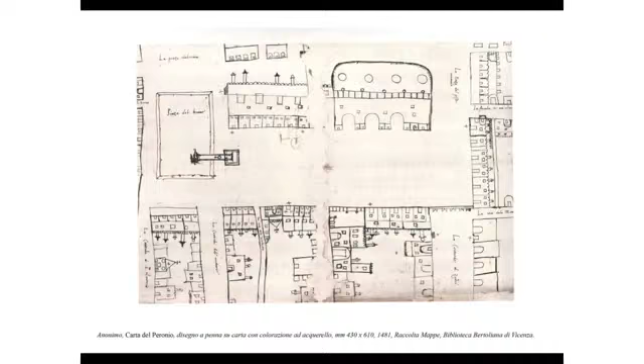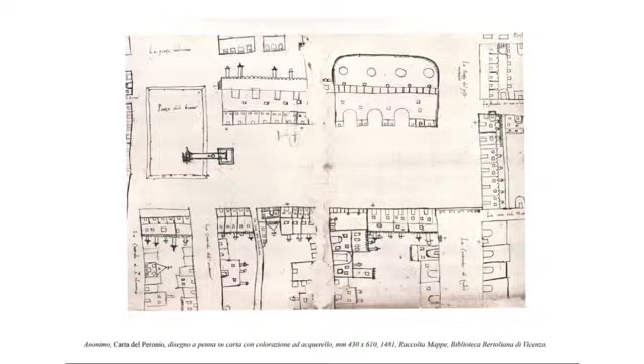After Palladio's intervention in 1550, the basilica has not been substantially modified up to now. In the 19th century, various proposals to modify, sometimes significantly, the large hall and the arrangement of the workshop were submitted. However, none of them was implemented.

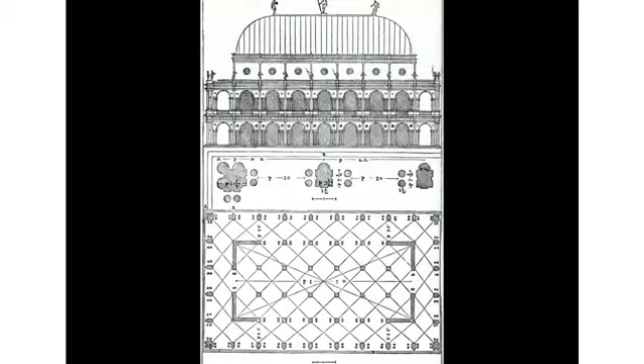Meanwhile, Palladio's worldwide reputation was growing, drawing the attention of the public. However, this interest also entailed a certain degree of carefulness.

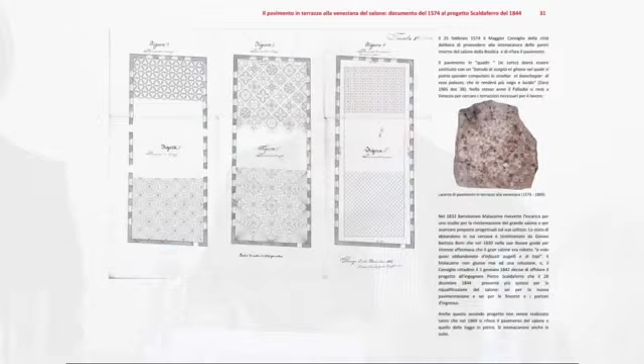We see the 19th-century project of transformation. The maintenance works were carried out with utmost attention to be consistent with the original project. We found plenty of documents of this work, which proved extremely helpful during our intervention.

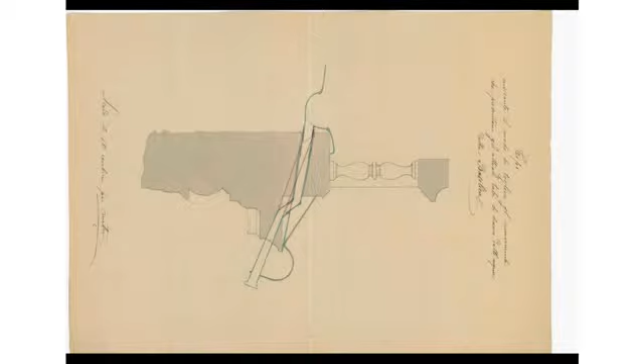The maintenance intervention. In the 20th century, the growing interest in Palladio's work brought about the implementation of significant restoration interventions of the basilica.

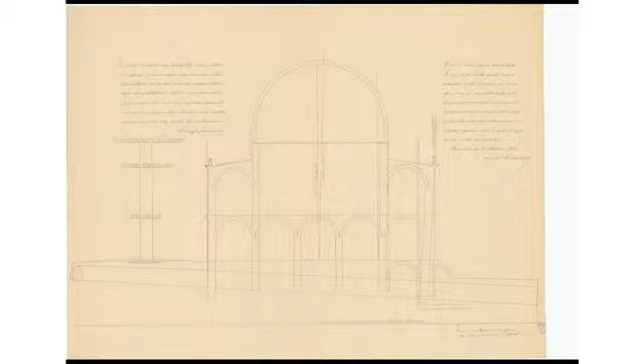The first one, on the strength of walls supporting the large roof of the hall, focused on the side of Palladio's loggia looking onto Piazza delle Erbe. The works aimed at reducing the visible warping of the walls, a problem that had affected the building for over 50 years.

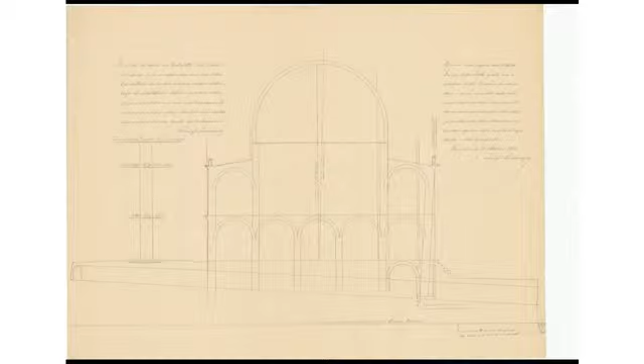The second major intervention, carried out between the end of the 40s and beginning of the 50s, concerned the reconstruction of the large roof in the shape of an upturned ship's hull covering the hall, which had been destroyed by a fire originating from sparks of the bombardments of Vicenza during World War II.

The third and last intervention is the restoration that we carried out in the past 10 years. As for the topic of our meeting here in Riga, it's rather interesting to understand what lies beneath the contemporary intervention carried out on a monument inherited from the past.

Innovation meets the past. This concept initially concerned exclusively the relationship between ancient and modern shapes, but then it was extended to the methods. The first intervention of the 30s features two apparently contradictory aspects.

On one hand, the use of reinforced concrete was made in strict compliance with modern restoration materials and techniques. Therefore, it is in line with the principles and recommendations proposed in the Athens 1931 Charter of Restoration.

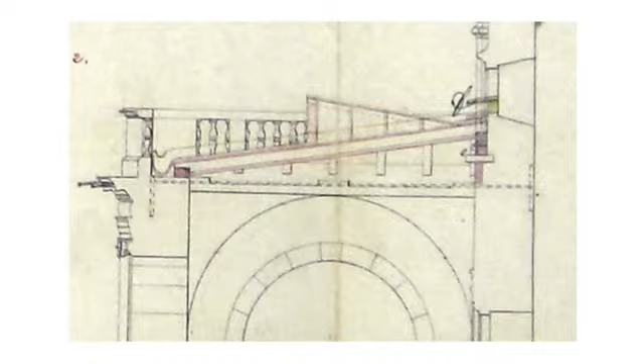On the other hand, what is not very much in line with the beliefs and working methods of this period is the choice to strengthen the frame of Palladio's loggia along the side looking out onto Piazza delle Erbe, as it was designed in the 19th century. Indeed, the wooden structure was replaced with a reinforced concrete one.

This was made in spite of the major recommendation of that period, according to which the focus was on the recovery of the original shapes and not on the preservation of the following transformations and stratification. Indeed, it was believed that truth was to be achieved through historical research.

More complex and very well defined is the intervention carried out in the period after World War II, from 1948, to rebuild the roof of the large hall, which burned down in a fire originating from sparks of the aerial bombardments of Vicenza.

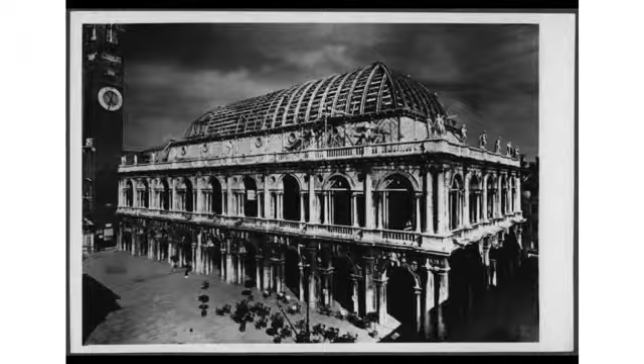We see the main hall after the collapse of the roof. Now we see the works of the reconstruction of the roof. The number of documents accompanying the works is definitely much higher than the documents concerning other significant works carried out in the same period.

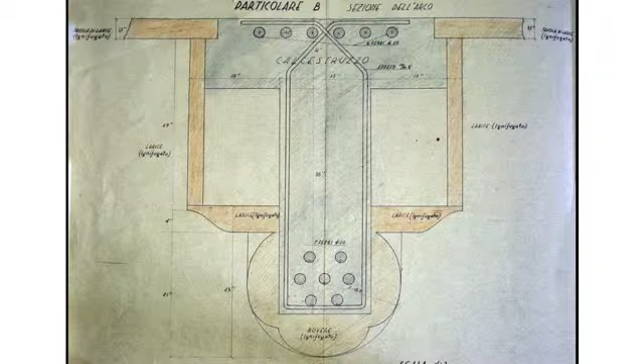This is probably due to Palladio's fame. It is not by chance, then, that the pictures depicting the workers operating on the wall were all taken from a specific spot, featuring in the background another building designed by Palladio, the Loggia del Capitaniato.

A striking example, since the work in progress that we see in the picture was carried out based on the envisaged concept of the arch contained in this picture. As for all the other arches, and it is important to stress this aspect, the envisaged concept was completely non-compliant — an intervention that, while highlighting a technical know-how, ended up being a work expressing a huge degree of fantasy, which was remedied by us.

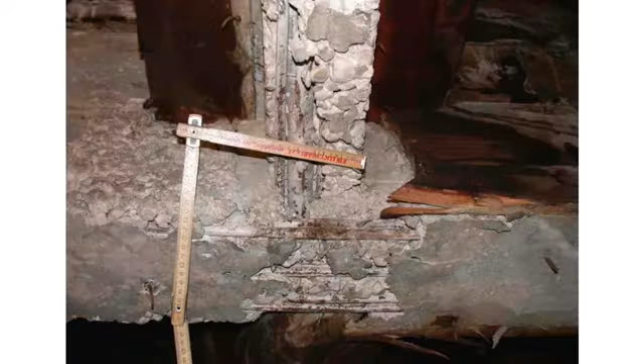The reconstruction of the roof of the hall was made using reinforced concrete arches with a wooden cladding. Such cladding was constructed according to the shapes we believed to be the original ones. After just 10 years from the previous intervention, the setting remained substantially invariant. The new structures were inserted in the wall or completely concealed by the reconstructed parts.

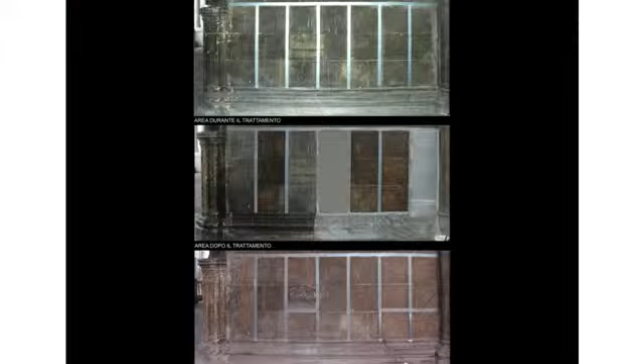Now let's talk about the third restoration intervention that we carried out between 2005 and 2013, devoting 2.5 years to the investigation and design, and 5 years to the building site.

The investigation campaign aimed at understanding the quality and type of material used, the level of decay suffered over time, the present situation, previous treatments made on the material, other interventions carried out over time, any collapse, as well as the disarray of the 19th century following the settlement that occurred while building Palladio's Loggia. We see analysis of the building material and cleaning tests.

We managed to outline a broad and complex framework, which spurred us to think about the intervention possibilities according to the materials and the structure.

As for the material, we planned and implemented interventions to remove the black and harmful elements without affecting the substance and form of the materials. This allowed us to bring back to life the color of the decoration where present, and to reveal the actual colors of the various types of stones utilized, enhanced by the natural aging process.

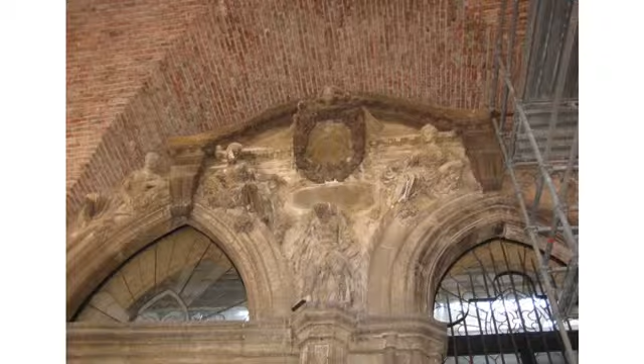We also managed to protect the accurate maintenance interventions that were carried out from time to time during the long history of the monument, from the strengthening intervention carried out on the statues placed by Palladio along the loggia as decoration, to the treatments made on the stone materials and plastered surfaces.

The second important chapter of our intervention consisted in the installation of various plants, including units and ducts, to make the Basilica Palladiana fully usable, always complying with the rules and regulations in force. The units were installed in unused areas under the Corte dei Bissari, which we see now in the photograph. This unused area was completely redesigned by interpreting and expressing the potential of such a meaningful place.

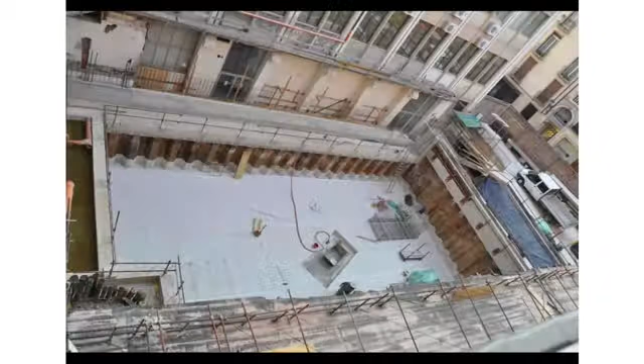The construction of this new structure allowed us to build modern and efficient plant units implemented with the most sophisticated and cutting-edge technologies, without ever affecting the Basilica. The paths of the plant ducts were determined according to accurate and precise research carried out on the material structure of our monument.

We identified all the empty spaces where they could be installed without affecting either the shape or the structure of the monument. We complied not only with the visible elements, but also with the apparently invisible ones. We can certainly assert that our conservation intention went beyond what you could actually see, thus creating a new way to experience the union between the ancient monument and the contemporary intervention, the new.

We see the description of the plants.

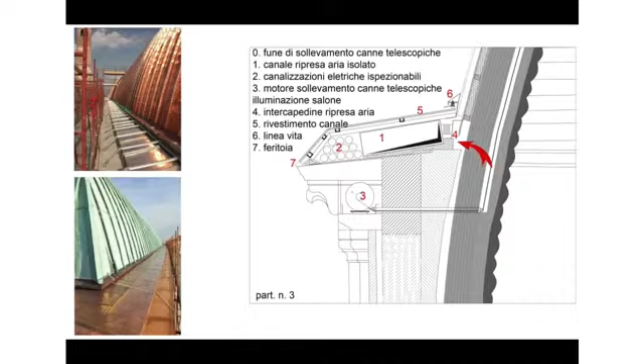Last but not least, we should consider the topic of structural strengthening, mainly implemented to support the large roof of the hall. The investigation carried out highlighted a very complex situation.

Right from the strictest analysis, it was clear the arches were in very bad condition. This was really rather alarming, since the unstable situation was not the result of normal deterioration, but of the way each arch had been constructed.

During the design phase, we studied and outlined two different solutions. The first was to strengthen the existing arch by overlapping metal structures. The second was to completely replace the reinforced concrete arch with a plywood arch. We decided to opt for the second solution.

The choice was made to comply with both the technical requirements, specifically to enhance seismic safety, and the shape requirements. Strengthening would have significantly changed the geometry and construction shape, especially inside. On the contrary, the use of plywood allowed us to fully recover the existing wooden cladding.

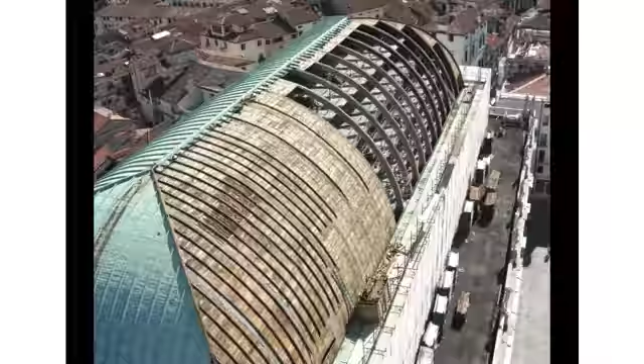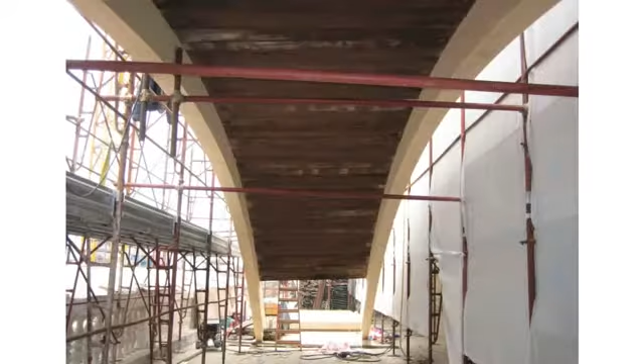The work itself was extremely hard to carry out too. When we cut the arch and noticed the material it was made of crumbled apart. The reassembling phase was difficult to perform too, mainly due to the extreme accuracy required in constructing the joints at the top of the arch.

The pictures that we see here only partially show such a degree of complexity. During our intervention, innovation and past were joined together by the methodology we used. The principle of compatibility sweeps away the difference between traditional and modern when we had to select the materials and technique. We had to put aside the 19th century idea of history as truth, since we realized that research can be never-ending and therefore does not forcefully lead to a real truth. We left behind the experience provided by the operational standard in favor of contribution provided to each construction phase to bring the monument back to life.

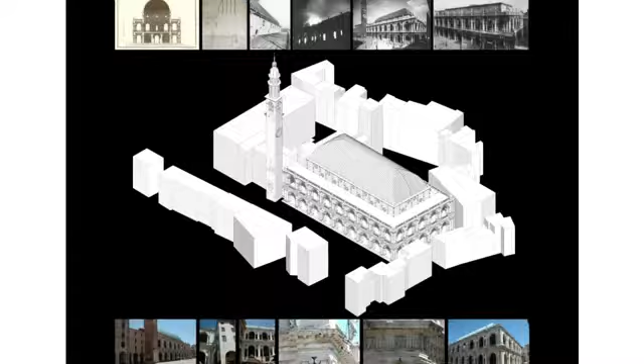We did not make our choice based on ideas, but on knowledge of the actual functioning of the construction itself. The solutions proposed to preserve the materials, install the plants, and strengthen the structure are all based on the same principle: preserving the basilica as much as possible by complying not only with formal requirements, but mostly with the construction ones.

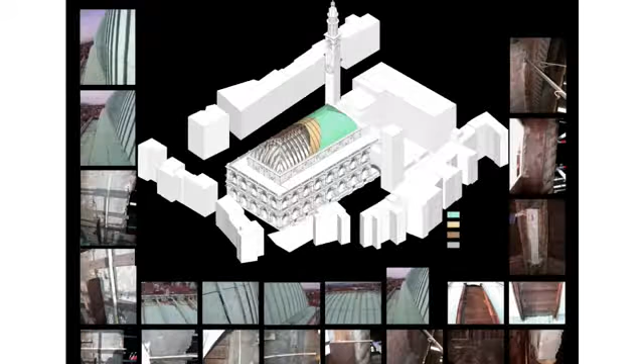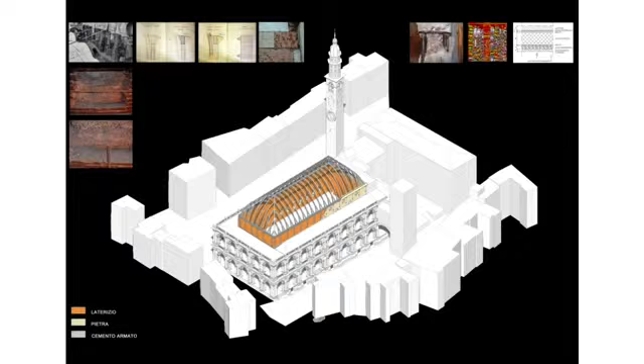Not only formal requirements, but mostly with the construction ones. And these solutions were analyzed according to the result of a thorough investigation. Therefore, the choices we made were all based on an interpretation model of the material structure of the basilica, capable of joining together shapes and structure, as well as what is visible and what is invisible, a model represented by the table that we see here.

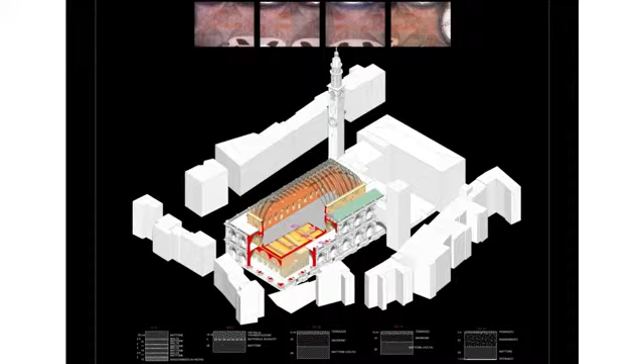Thank you very much for your attention.

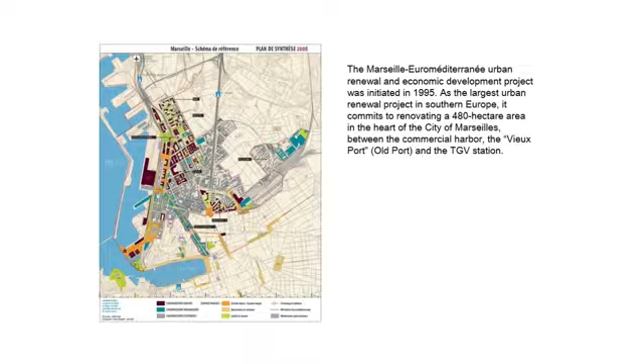It's another map of the city, probably more clear, with the harbor on your left, and the new part, which we call the J4. Why J4? Because the old port of Marseille was called Port de la Joliette, so J is for Joliette, and there were different parts of the port: J0, J1, J2, J3, and J4. The J4 was an interesting part of the city because it was where all the immigrants during the 20th century came into Marseille, from Armenian to Algerian immigration at the end of the century.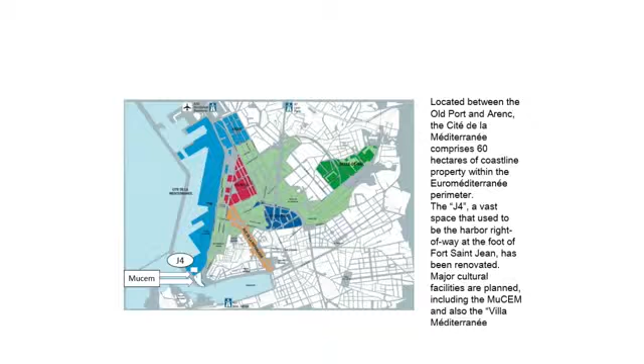So the J4 was closed because the commercial harbor of Marseille was transferred in the 70s, 40 kilometers from Marseille, to a new commercial harbor called Fos in French. That's the reason why there was a big opportunity to reconstruct the center of Marseille using part of the commercial harbor.

At the beginning of the 90s it was decided by the city of Marseille, but also by the French state—because in France, as you know, all that is important is sometimes managed by the centralized state—and they created a state agency, also called Euro-Méditerranée, to reconstruct this large part of the city, from the TGV station on your right to the commercial harbor, with different areas.

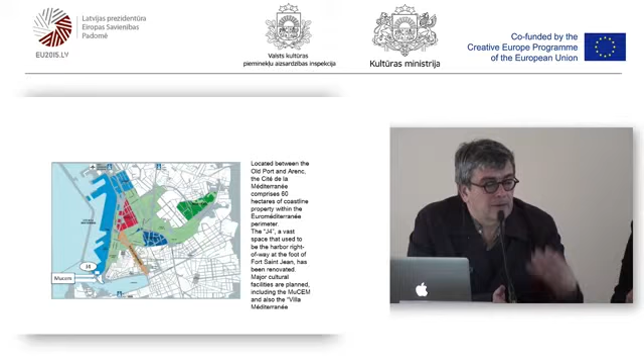And the idea was to reconstruct it. There was an architect and urban planner, especially Yves Lion, a good French architect. We proposed to create at the center of Euro-Méditerranée a cultural part. It was very interesting, because Marseille before this Euro-Mediterranean planning had basically no center.

Marseille is a harbor with a few parts. There is no big square. There is not a big building for the city council. There is no centralized conception of the city.

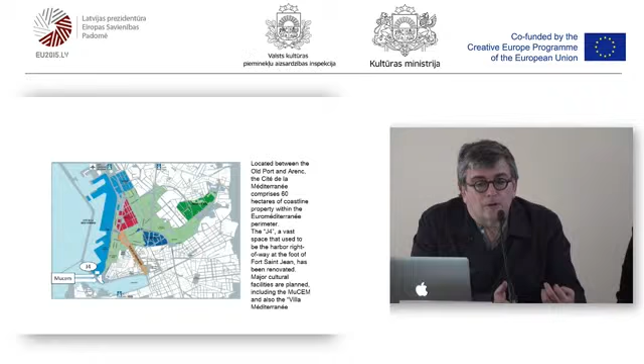And the idea was not to recreate, which would be completely absurd, a new center, but to have a new part with some cultural venues, especially the MuCEM, the Museum of Civilization of Europe and Mediterranean.

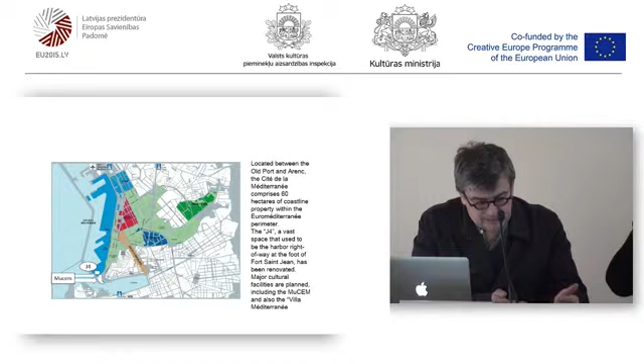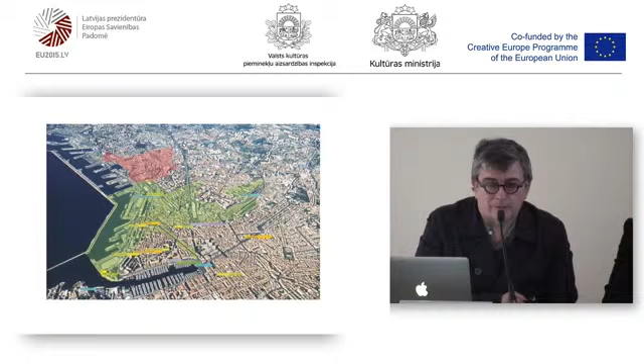The MuCEM, I can show you. This is the aerial view, probably more clear than everything, with the old port, the Vieux Port, in this picture. In a photograph, you can see the old port. There is another possibility, the commercial harbor of the Joliette, with all the J1, J2, J3, and J4.

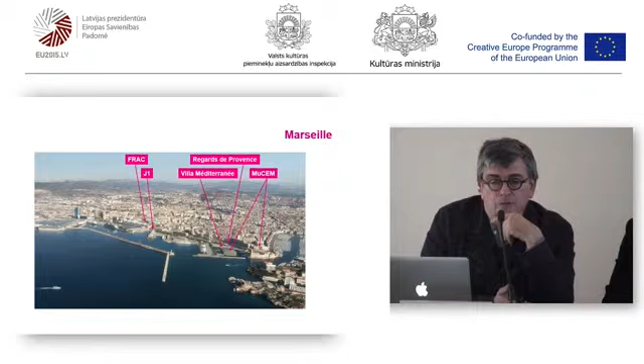The idea was to create a series of cultural venues in this new part of the Euro-Mediterranean project: a contemporary art center, called in French FRAC; the J1, an old venue of the port; the museum, which you've seen on your right; and two other buildings with cultural purpose, the Regards de Provence, a museum of local painting, and Villa Méditerranée, a building made by Stefano Boeri, dedicated to Congress and discussion about the Mediterranean.

And the museum. What is the museum? The museum has a curious story. It's a little long to explain all the details of its history.

At the beginning, it was a national museum of folklore, called in French Art et Traditions Populaires, popular art and tradition, located in Paris in the west of the city, in the Bois de Boulogne, which opened in the beginning of the 70s and was not very successful. The decision of the state was to transfer it to Marseille to begin a new course for the museum, using the collection of folklore and tradition, not only French but also European folklore, transforming it into a museum dedicated to the Mediterranean.

And the second idea was to use an old building, Fort Saint-Jean, a former military complex created by Louis XIV at the end of the 17th century. It's not made by Vauban, because many people say it's a building of Vauban - when you have a fortress in France, normally they say it was made by Vauban - but actually by a student of Vauban, Clerville. It was never open to the public.

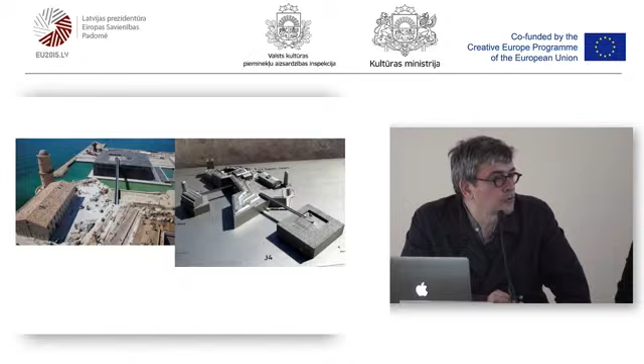The winner of the competition was Rudy Ricciotti, an architect you probably know because he made the new part of the Louvre Museum, which opened two years ago, for the Islamic art department. He is also the constructor of a new stadium in Paris, called the Stade Jean Bouin.

Ricciotti is an architect living in the south of France, not in Marseille, but in the neighborhood of Marseille, in Bandol. The idea was to use a special concrete, an experimental one - I can show it in these three pictures. Now a registered trademark, it's called BFUP, B-F-U-P, concrete with a big capacity of resistance.

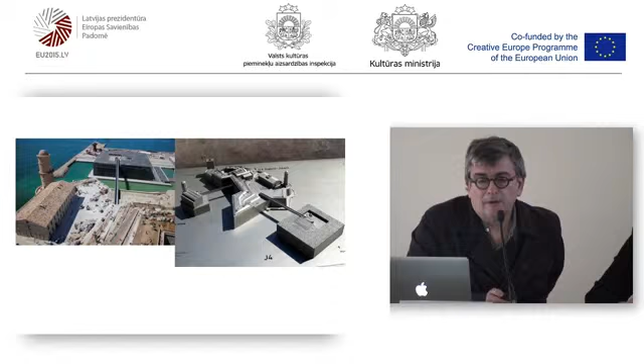With this material, Ricciotti conceived the part you've seen in the picture, and also the footbridges, which you've seen in this picture. There are two footbridges - I will show you better in a few moments. So, he used this special concrete to create this new museum.

So there are finally 2 buildings. One we call the J4 building, which is the new building made by Rudy Ricciotti with Roland Carta as architect of the operation. This building is 15,000 square meters and contains more than 3,600 square meters of two large exhibition spaces.

I will show you a little bit. So the building is like this. On the first floor, there is a permanent exhibition dedicated to the Mediterranean. On the second floor, we have 2 large exhibition spaces which we can use separately or combined.

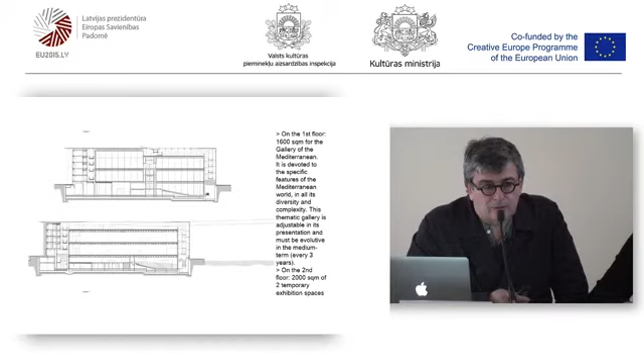This is the plan of the permanent exhibition made in 2013 about the Mediterranean. We opened it in June 2013 with a big transhumance, which is a symbol of Mediterranean culture. The picture is, I think, interesting, along with 2 big temporary exhibitions.

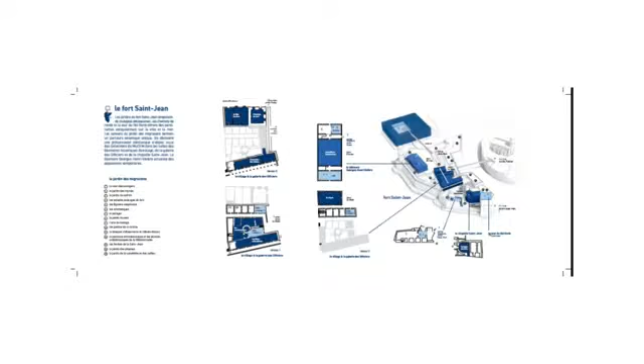The part of the Fort Saint-Jean, the historical building, is connected to the new J4 building with a 115 meter long footbridge. There is a second footbridge which gives us the connection to the city of Marseille, to the oldest part of Marseille called Le Panier.

So just to show this combination of a fortress, which is quite complicated to understand for our audience, because the fortress of Marseille is probably the oldest building in the center of Marseille, but difficult to understand because every part of the historical building, as you can see in the picture, was rebuilt several times. The last rebuild was in the 20th century, with a large part from the 17th century, but some Greek parts, some Roman parts, some Gothic parts, all combined like a sandwich, like a Big Mac. We have to explain to the public the different levels of history, and it's quite complicated to do.

And we created at the top of the fortress a new Mediterranean garden, because Marseille has few gardens, and the Ministry of Culture chose to create a new garden made by APS agency, a French landscaping agency. The idea of creating these two parts was also to restore the former historical building, but also to connect it with the new part.

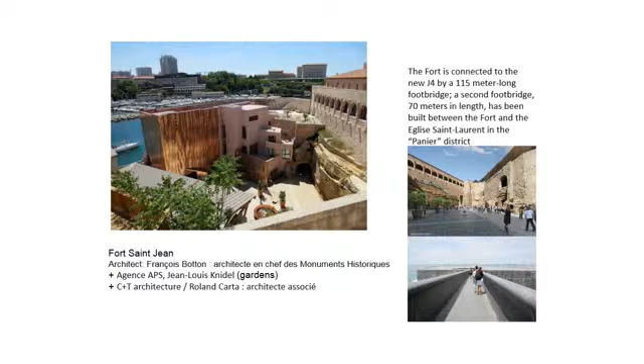Now, for the small conclusion—the question is interesting for Marseille, which is a city that, as a sociologist of Marseille has said, has more geographical history than historical history. I think the formula is interesting, because it's the case. Marseille is not well known for its historical monuments. We have, of course, a lot, but it's not very well known. Nobody comes to Marseille to see the old part of the city and its monuments.

The idea was to create a new landmark in the city, using the specificity of the waterfront, creating a new waterfront in the city, and combining the history of Marseille with the present of French culture. Thank you.

Mr. Chougnet, thank you very much for this important example of good practice, which shows a perfect interaction between past historic buildings and contemporary architecture. And the function for society you have mentioned is to bring into the mind of the people that Marseille also has an important history.

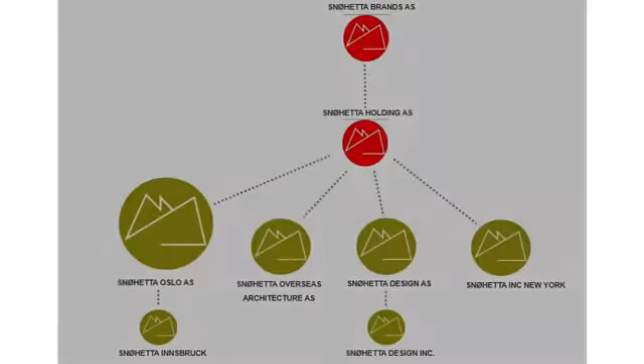And that's why we are also very eager to have this conversation along our goal to create great projects. This is where we are located, in Oslo and Lower Manhattan, by the harbor of Oslo. We would like to focus on the importance of sharing space, that architecture is created as a team. We have to really focus on finding young talents, and we would like to keep them within our culture in the company. That is important to us.

That's also why we are focusing on the creative process. This has been a research project named ID Work, looking at what really happens when you are in a creative process. I'm just going to introduce to you a few themes from this research project.

It's trying to define something which is very hard to define: what's really happening when you have a creative process. There's a book published, and I'm just going to introduce a few drivers, focusing on the creative drivers—something recognized when creative work is happening at its best.

One part that's important for us as architects is to be physical. The way we communicate is actually physical. Researchers, psychologists and anthropologists observing architects recognized that we use our hands while communicating. We don't look into each other's eyes, but we look at our hands while we talk about architecture.

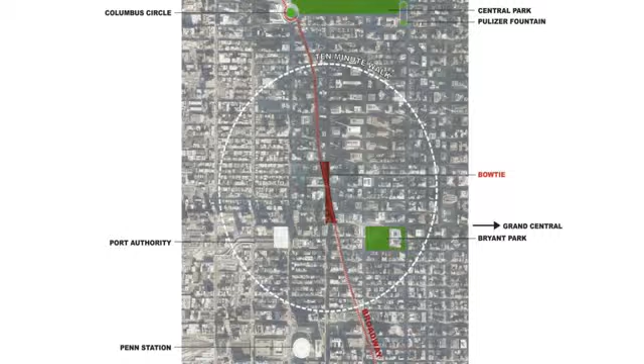It's the most intensive place on Earth, probably, but it's important to see it in a larger context—how far is it to walk 10 minutes, and what is the relation to the bow tie where Times Square is located. This project was a landscape project, and it wanted to introduce elements to improve the public space.

We also went to one-to-one mock-up pieces—how will people interact when you start to introduce designed elements in such a space? This has now been undertaken and fulfilled in parts of this project. It's been a long process with the municipality of New York, but it's interesting to see how the process behind it would lead to maybe not so large designed objects, but the way the process is built with dialogue—to test it, to zoom out, to go into one-to-one scale.

Another perspective which has been important to us is to try to seek some energy in the resistance in projects—how constraints and opposition can inspire your best ideas.

Creativity is not only about great and bright ideas, it's about solving problems. So generative resistance is about acknowledging doubt, friction, anomalies, and critique—not as noise to be avoided, but as levers to question the given and enhance imagination in everyday work. This is important when you want to work with difficult subjects: you should embrace the problems, because that's often where you find the good solutions.

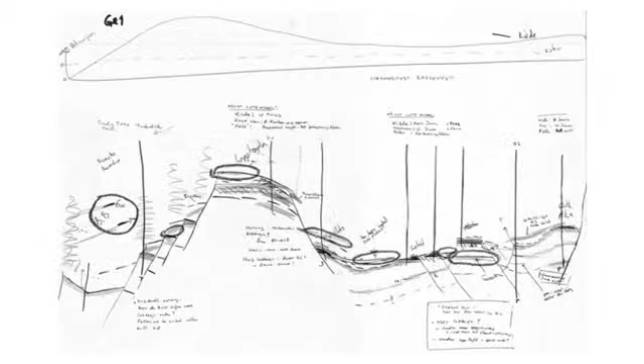They realized that geologists in one of the Norwegian oil companies searching for oil in the North Sea were also using this technique of getting physical—they make sketches, drawings, they look at geographical maps, using their hands. As architects, we make models and use our hands too, so it's part of this getting physical.

To us, it's also important that we use new tools, and new tools are actually changing architecture—they give us new possibilities. Designing the opera in Oslo, we were very much into the physical part of creating this project, but it was about folding cardboard.

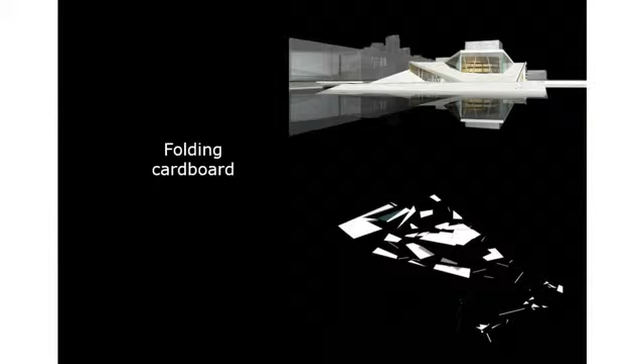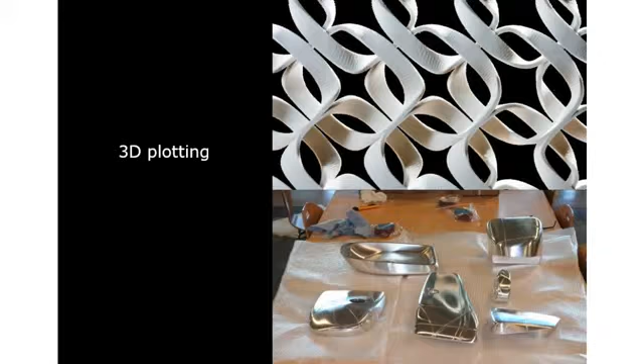Now 3D plotting has changed the opportunities. What can be done with this new technology is very important to how we develop our projects. The laser cutter can give us samples very quickly—we use these machines in our workshop all the time.

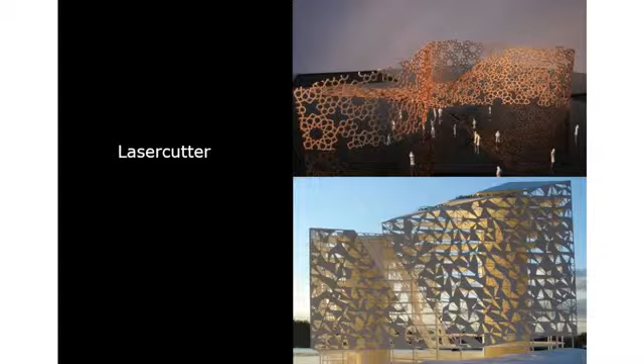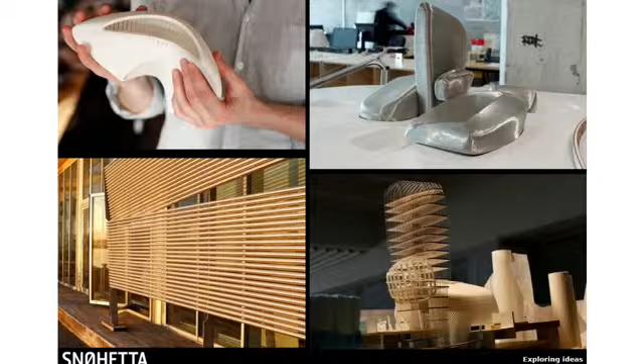It's important to us that we want to explore the potential and create prototypes of new interventions within structure, material, and techniques.

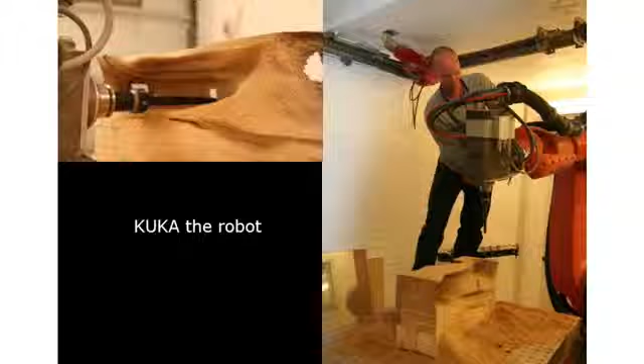So the meaning is, of course, these beautiful pieces are falling apart because there is no use for those buildings anymore. It's important to say that when we go into the future, we want to explore and get some knowledge from the past, but we are introducing new technology for how to develop. In that case, we made this pavilion.

It's up near the mountain named Snøhetta, where we got our name from. You just saw the first image of this lecture. They asked us to create this pavilion for communication and information about the Norwegian reindeers. So it's like this reindeer pavilion, viewpoints.

The idea is this very simple structure, but inside we have created the space where we use the wooden spatial interior. So this project is really creating a balance between the experience of space and the landscape. It's dedicated to the wild animals during winter. It's not accessible to people, but it's created there so that human activity with information and lecturing can be within the experience of space.

So again, we believe that architecture is very much about the psychology of space, and the relation to nature is very much about what's happening outside of the building. But to create this tension is what we are after.

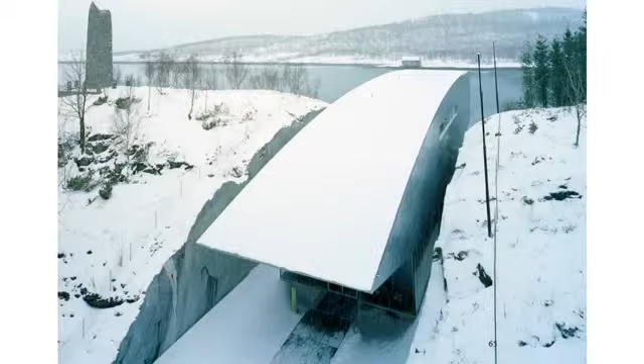In this case, we created the site by having this slot into the rock, and we replaced the rock with the museum building, and that's where it is. This creates a totally new dialogue between the past and the future.

One of the questions we have been exploring is how the concept of monumentality can be understood in a broader perspective. We were wondering how monumentality could be related to spatial experience rather than the traditional monument as an object with facades to be observed from surrounding streets. The concept of the opera in Oslo explores the potential of combining a building with a public plaza.

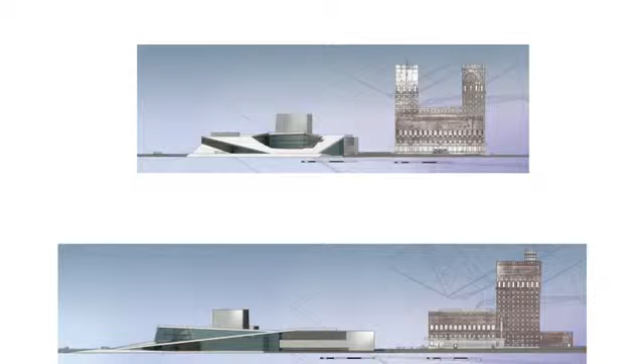It started with the urge to create a possibility to get in contact with the waterfront. This is just an illustration showing the opera next to the City Hall of Oslo. We were thinking, what if the building has the function of the plaza in front of the City Hall? We tried to relate these two scales together, and we realized the whole building could fit into this public plaza.

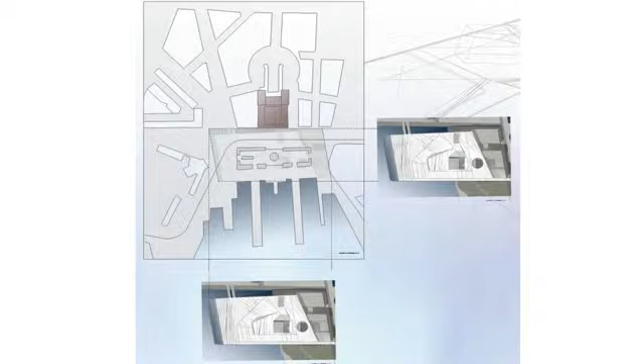The great thing is that we take the footprint of the building and give it back to the city and the people of the city. I think this whole concept is trying to grasp an idea, a dream, and share it so it's accessible to the people. The whole thing started with this dream to get in touch with the water, and that's where the whole process of this concept started.

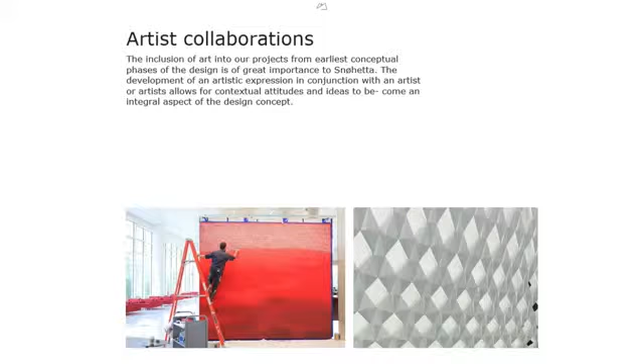To us, it's also very important to have collaboration with artists. The inclusion of art into our projects from the earliest conceptual phases of design is of great importance to Snøhetta. The development of an artistic expression in conjunction with an artist or artists allows for contextual attitudes and ideas to become an integral aspect of the design concept.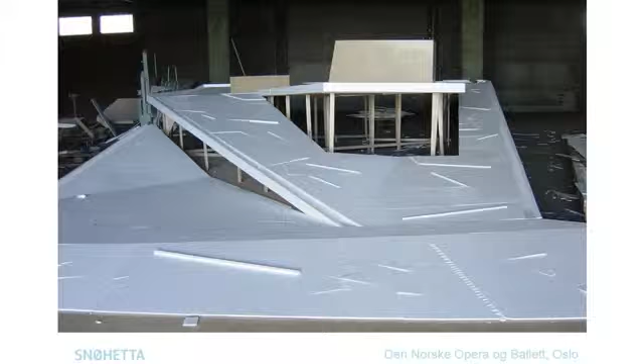In the case of the opera, we introduced a collaboration with the Icelandic artist Ólafur Eliasson. The notion of this space is enhanced by this artist creating this material with lights, so it's really in balance with the architecture, and it's been very important to how we develop the project. We've also been inspired by the traces of human activity up in the mountains of Norway, collaborating with artists to create patterns on this large roof of the opera, to be shared with and experienced by the public.

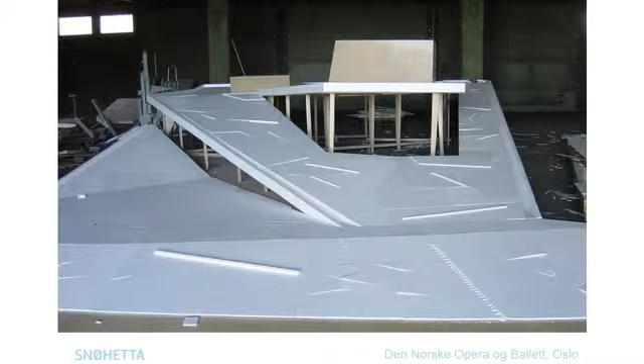How can the idea become part of an architectural concept? It seemed like a dream, but it also gave us motivation and power to explore the contradiction and eventually fulfill this dream. We believe that the key is to share your dream. Then it can become true. In this case,

It's marble from Carrara in Italy that has covered the whole 20,000 square meters of roof landscape, which is also an artwork. So it's not only a building, it's a dream, it's a space, it's a plaza, it's an artwork, it's shared, and it's totally out of the architectural program. This is the non-programmed space of the competition.

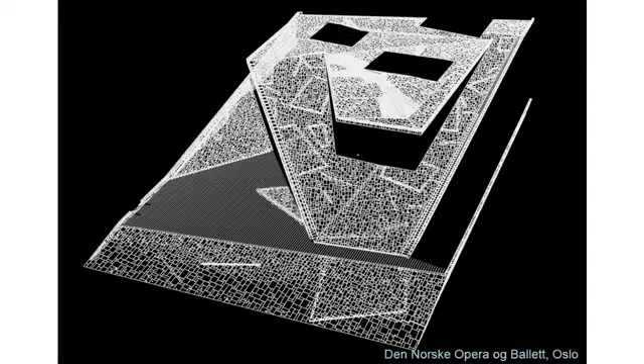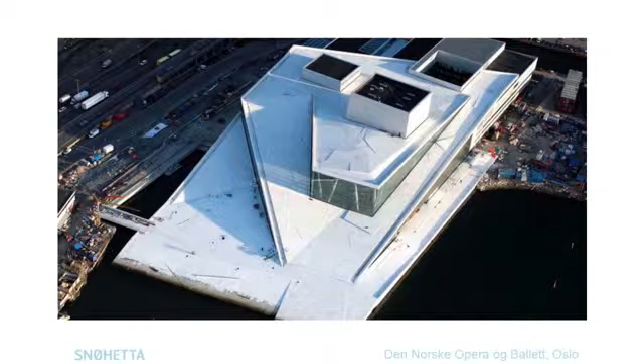During the design phase, we were not allowed to increase the cost for the building. Our client was really afraid that we would put too much money into the roof, and they were really afraid to make it accessible to the people, because then you have all the security issues. But we managed to give it a status as an artwork, and we got extra funding by giving artwork funds to the project. This is really what made the building possible.

Now, integrated art—this is another art project which is integrated. It's made by some artists, how to introduce patterns to these metal sheets. In the interior, it's wooden works, and there is also an artwork of the curtain in the big theater space done by the artist Pae White. It's called Metafoil. It's weaving in textile, but it looks like metal. It's really a great piece of art.

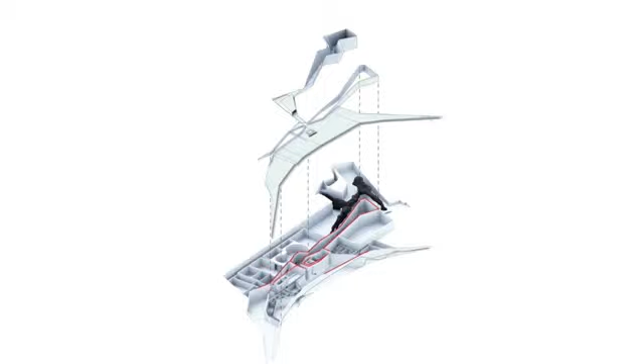There was a competition some years ago about a new entrance to the caves. So it is a museum project, but it's relating to this context, which is very extraordinary. Mainly this project is about how to enter the cave, and it's also creating a replica of the cave in order to protect the original, because it's not possible for people to enter the original caves—they are so fragile.

I was just going to show you this project because for us, to introduce a concept, it's about the experience. This project is trying to enhance people's experience of entering the cave. The architecture itself is trying to be more set back into nature—it's a composition with the landscape and the context. It's not about shape or material or expression.

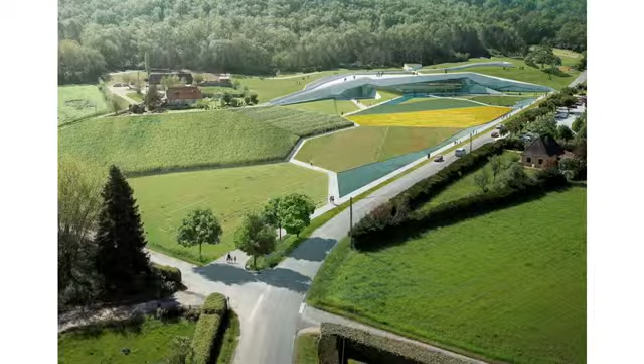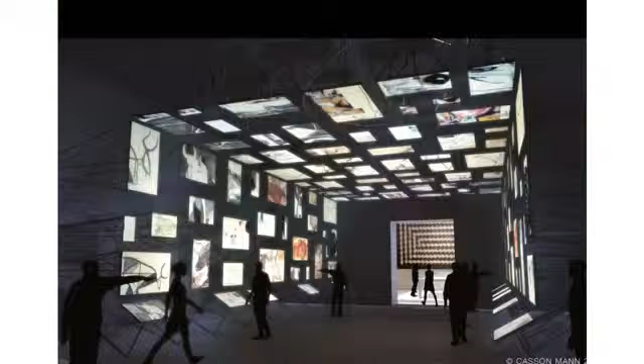It's more about its content. I think in this manner it's possible for people to really experience the cave and do it on their own premises. So that's the idea of this project, that the people would have their own experience inside the space. And with new technology, you can give public information in many different ways.

Yeah, this is really exciting to understand more of the background of this project. I will not go into this discussion, but I think in order to keep our time schedule, we can stop here.

I just wanted to say to Jean-Francois that one interesting discussion could be that in Marseille, you have a new building added to the historical context. But what's happening is actually that the balance between these two projects makes a new experience possible. You would never be able to experience that old fortress without this new modern project, creating the possibility for the public to access it.

I believe that in order to take care of our cultural heritage, we need to see the role of modern architecture. It is like a pas de deux in a dance play. It's the combination of the new and the old that really gives the opportunity to have an experience and to communicate. It's when you have the dialogue that things become interesting.